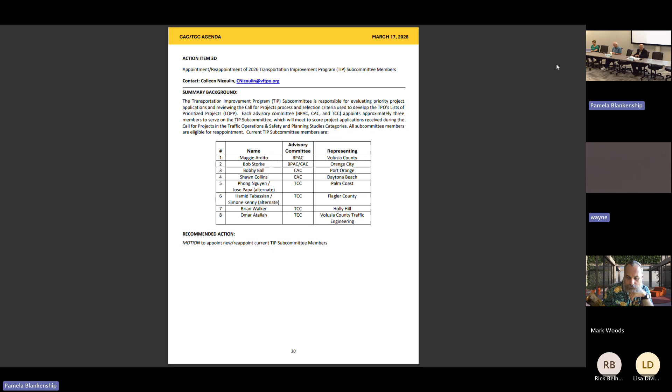Under presentations and discussion items, the first one is a presentation and discussion of the adopted Flagler County 2026 to 2035 Transit Development Plan.

Thank you, Mr. Chair, and thanks committee members for your time. I'm Jonathan Roberson with USF CUTR, and wanted to give you an update on the Flagler 2026 to 2035 TDP, which was adopted last night by the Board of County Commissioners.

I'll talk real quickly about the evaluation and alternatives development that happened since we last discussed this, an outline of the short and long-term needs identified, some recommendations for the next 10 years, and approval of the draft.

What is the 2026 to 2035 TDP? It's Flagler County's update to the previous TDP effort from 2022. By doing the TDP, it meets the requirements and allows Flagler County to qualify for annual public transit block grant funding for operating expenses. And the TDP identifies public transportation needs that are both considered cost feasible and unfunded, which we'll get to.

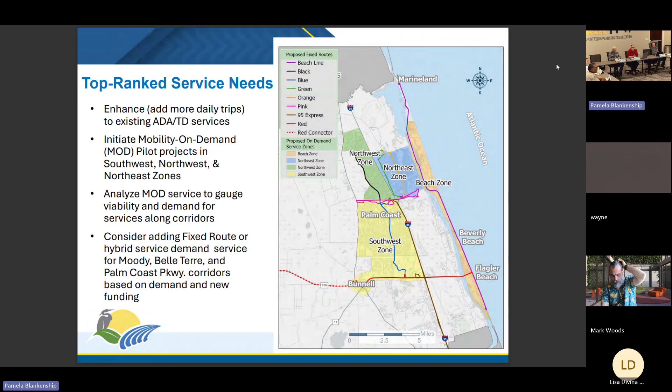Okay, we'll move on to C, which is presentation and discussion of the 2026 TPO annual call for projects.

So we just appointed and reappointed our TIP subcommittee members. Those are the members who will be reviewing the projects on this list in the traffic operations and planning studies category. But what we wanted to do is identify all the projects we received. We did receive 22 projects during this call, which is actually a heavy lift for us, so we were very excited. It's more than we've received the last few years, going back to pre-COVID times when we would receive those applications. But we do have it broken down into the different categories of the application.

So we have 2 different bike ped applications that we receive. We take in feasibility study applications, so those are local governments that wish the TPO to conduct a feasibility study, to look at potential projects, identify cost estimates, and see if the project is feasible, whether or not there are any obstacles to eventually constructing that project. A local government is not required to go through a feasibility study through the TPO. They can do that in-house. So some of our larger member governments do that in-house, such as Volusia County and Daytona Beach. Some of the medium-sized and smaller governments do come to us for feasibility studies.

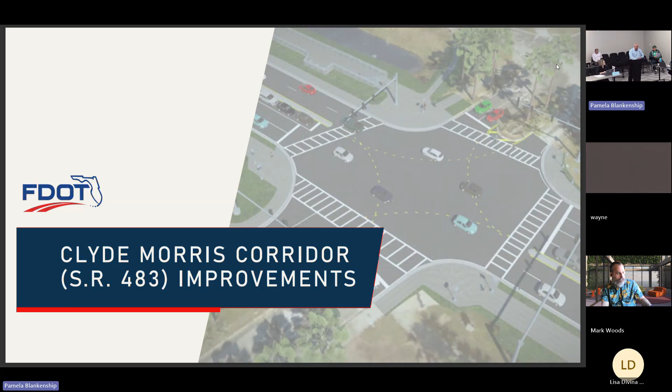Sorry for the little snap over here. What I'd like to do today is talk to you about some exciting improvements we've got on Clyde Morris Boulevard, from Beville Road, State Road 400, north up to Mason Avenue in Daytona Beach. Quick project overview: we're going to mill and resurface all the pavement within the entire project limits. We're going to construct the project into 3 segments, trying to take advantage of the available funding and take care of some of the higher priorities as we build them in segments. All sections will include, for most of the project, a 14-foot multi-use path on the west side of Clyde Morris, primarily between Beville Road and International Speedway. I'll get into that a little bit more.

We're going to introduce some raised medians instead of the 5 lanes you have out there, doing some access management with medians and better defined left turn lanes. The 4th bullet, I really want to emphasize it's not a typo: we are going to build a pedestrian underpass under Clyde Morris at Embry-Riddle's main entrance. I've got a little more on that coming up. We'll upgrade the drainage, part of which is closing the canal from International Speedway up to Richard Petty and piping that, putting a 14-foot trail on top of it. We'll improve the lighting through the whole corridor, upgrade all the traffic signals to mast arms, and upgrade the pedestrian buttons at all these signalized intersections. We are also working with Volusia County and the airport on possible realignment of the Bellevue Avenue extension.

They're looking into the feasibility of that. The county is. We're definitely working with them in whatever we can do to help that project along.

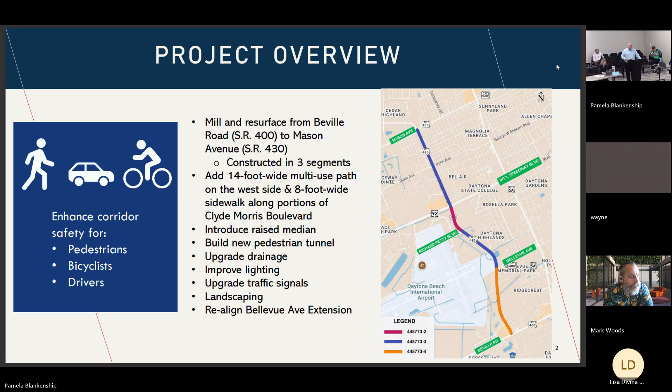The first segment I want to talk to you about is the segment you see in the box there. It's the red section, fairly small, but it gives us a good opportunity to get started. We're going to pipe the canal on the west side there between the Embry-Riddle parking lot, which used to be their soccer fields, and Clyde Morris itself. We're going to resurface.

We're going to put some raised medians in there. We're going to reconstruct the signal at Richard Petty. One thing not on this slide is we're going to add pedestrian features at Buccaneer Way, so they've got access to the 14-foot trail across there, and they won't have to cross International Speedway now. They could come down the west side and cross at Buccaneer Way.

We're going to work with the city of Daytona Beach and Florida Power and Light to accommodate their impacted utilities at the pedestrian tunnel. So Florida Power and Light will actually go underground. They're working with Embry-Riddle to underground all the facilities through the whole campus area. The current schedule is we're going to open the bids this fall and hopefully get started construction by the end of December if possible. The estimated cost right now is $9.9 million for that segment.

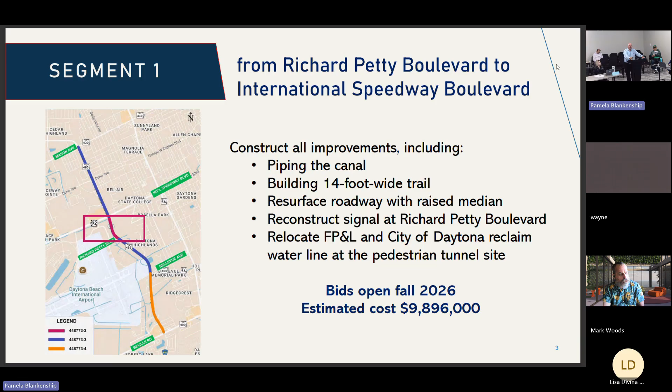Section 2, or segment 2, is broken up for the purposes of the presentation. It's 2 separate areas, but it'll be one construction project. The first one is from Aviation Parkway/Bellevue to Richard Petty. This is primarily in front of the campus itself and at the end of the runway. This is the section here. We're going to build a pedestrian tunnel at Embry-Riddle.

It's worth noting we did some pedestrian counts out there on 2 different days, a Tuesday and a Wednesday midweek, while class was in session. The Tuesday count was near 1,500 pedestrians between 8 a.m. and 4 p.m. The Wednesday count was almost 1,700. I'm not sure we have a busier crossing in the district that I'm aware of, so it is very, very busy out there. So the pedestrian tunnel is greatly needed. I'm not sure if everybody's aware, but there were 3 students hit last October out there, so this is good timing for this to come on board.

We're also doing some raised medians. The 14-foot trail will go on the west side, and we'll do an 8-foot sidewalk on the east side to tie in what's already out there. There's an 8-foot sidewalk there for a piece of the section, we're gonna match that. Again, we'll upgrade all the traffic signals with mast arms and pedestrian push buttons.

Segment 2B, if you will, is from International Speedway north to Mason Avenue. The primary work here is mill and resurface the roadway. We'll upgrade all the curb ramps to comply with ADA, upgrade the traffic signals primarily at Dunn Avenue to mast arms, and make some median improvements as we approach the hospital main entrance.

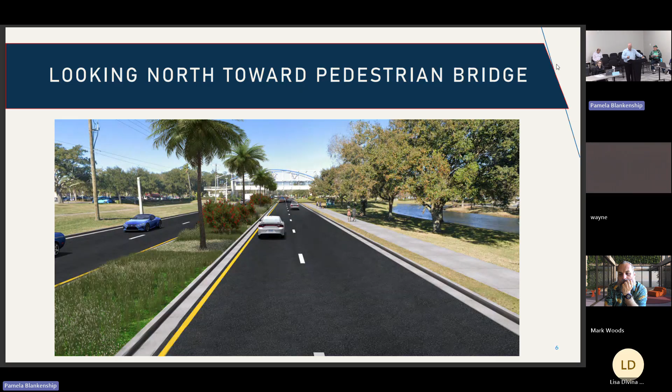A few features I do want to point out that the underpass will have: of course, very extensive waterproofing, so we won't have any leaking. It is a little wet there. We'll have some pumps on each end at the bottom of the stairwells for rainwater that comes down; those will automatically come on. We're going to do some CCTV infrastructure, and the campus will put in their cameras. We're going to do the blue light phone infrastructure, the student emergency call phones they have throughout the campus. We'll add the infrastructure within the tunnel for that and put in LED lighting.

So it'll stay very well lit all hours of the day and night. Because of the narrowness of the road, we can't put in a natural light in the middle, but we'll have a lot of LED lighting through there.

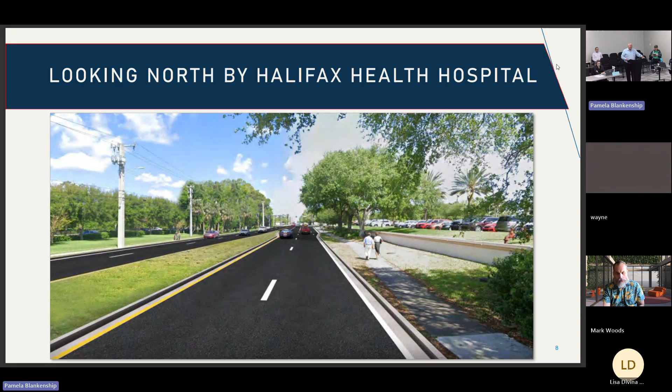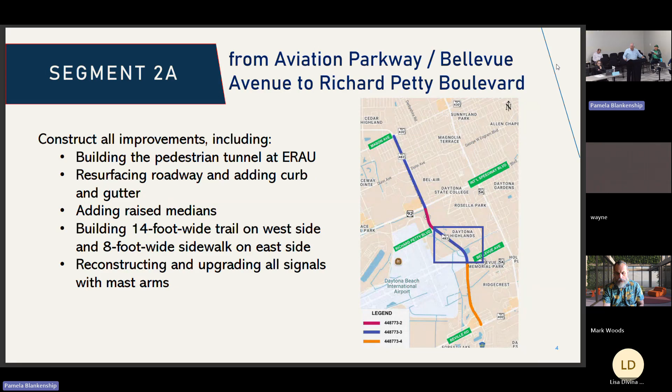Let me go back real quick. I skipped one thing I want to mention on section 2. The bids will open in the summer of 2027, sometime in the July timeframe. The construction estimate for all of those improvements is 12.8 million.

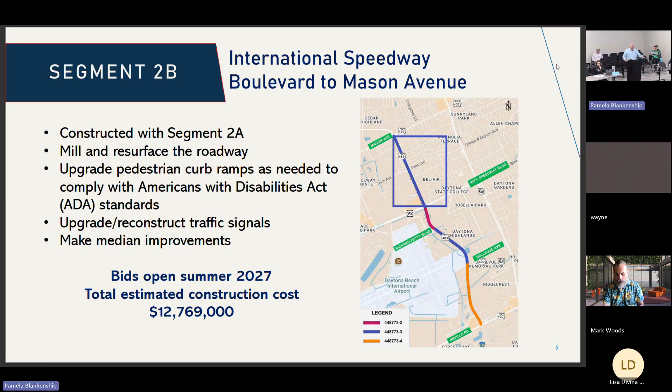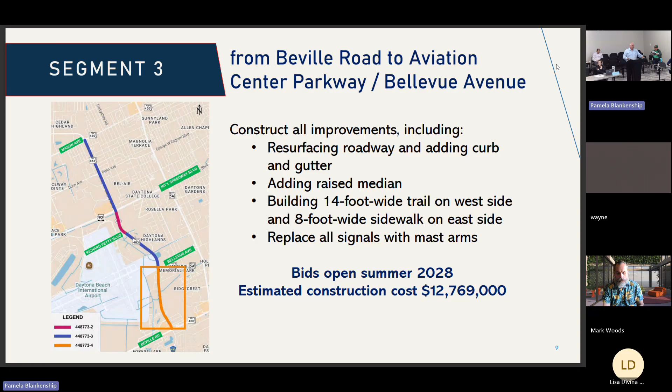Segment 3 will open those bids in the summer of 2028, hopefully around the July timeframe. Estimated construction for that piece is 12.8 million. There's a lot of drainage structures in there, so we'll have to pipe everything and get the water to the current drainage systems that are along the corridor.

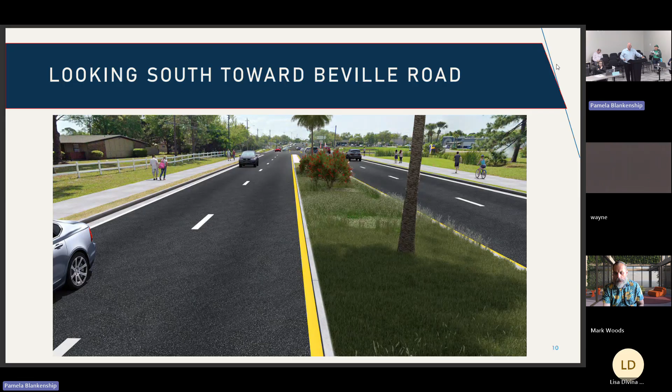This is just a quick look down near Corona, looking south. On the right-hand side is the Publix Plaza, and Beville Road is at the top of the picture.

Real quick, estimated schedule. Since we are breaking it up, we're trying to overlap the projects as much as possible, so it does appear as one project even though it's three separate ones. The first one, we'll open the bids in the fall of this year, hoping to start construction in December of this year. Estimating about a 9-month construction time on that.

By the time that one's wrapping up, we'll start segment 2, which is 2A and 2B, and that should run almost a year. Then we'll open up the bids for segment 3, taking us out to 2029 or almost 2030 before total construction is complete.

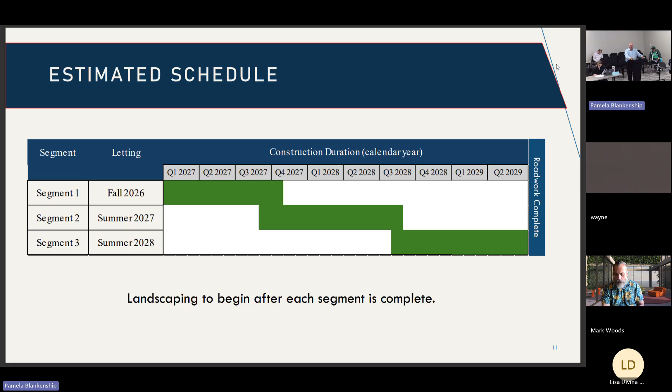One thing I want to point out: after each segment is done, we'll do a landscaping project. I don't have this design done yet, we're working on that, but we're going to try to schedule the opening of the bids for the landscaping projects before each segment is done. That way they can just go right in there and complete it, and we'll have a finished product as they march down the road.

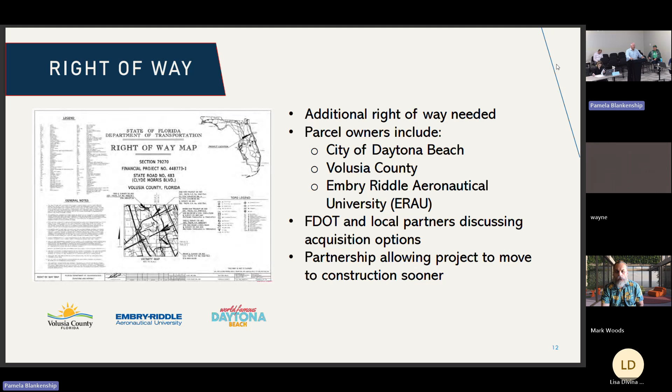This is important: if the DOT had followed our normal process on this, we do have some right-of-way needs, and our right-of-way process, whether it's 1 parcel or 100 parcels, is about a 2-year process. If it weren't for working with our great partners in the city of Daytona Beach, Volusia County, and Embry-Riddle, we would need another 2 years before we started construction. But they've come to the table, they've partnered with us, and they're donating the right-of-way that we need to complete the whole project. We could not do this without their help, and it's very important that we point that out.

I think I went through this a little quick, but do y'all have any questions?

Yes, sir, if you could go back to the slide with the pedestrian tunnel. Yes, sir. There we go. I'm just wondering, is there a reason why, or has it been considered, that right where it curves off of the main walkway there—yes—

on both sides, a cover over the walkway, not a full cover, but something that would channel the water off to the sides. The reason I ask is my concern—just throwing it out there—is when you get to that point and then to the other side, the same thing: I'm afraid people in the rain, instead of walking all the way down and back, will run across the street and get hurt. But if it's covered and the water channels to the sides, it doesn't run down the ramp as much, and it encourages people to get in there under cover versus walk across the street in the rain with low visibility, et cetera.

That's something we had not looked into, but I've got a note here to see if it's something we can do. Keep in mind, the wall is only about 3 feet high along both sides. It starts around 2.5 feet and gets higher as the ramps go down. So covering would be, I don't know, we'd have to look into it. Thank you, I appreciate that.

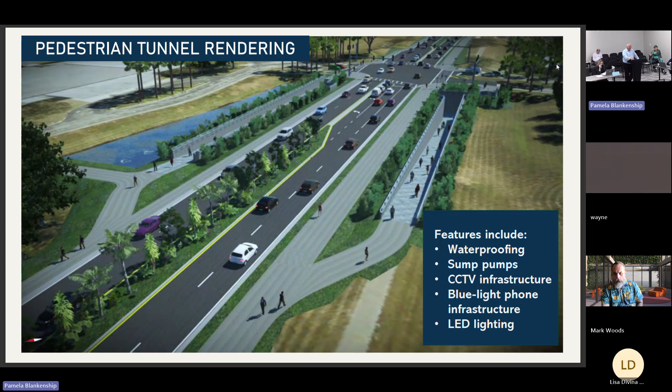Good afternoon, happy St. Patty's Day.

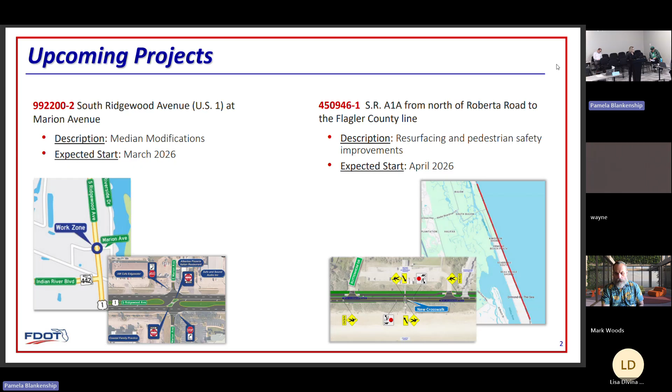Just a couple of things, real quick. I want to start off with a couple of projects that we have starting. We have some median modification starting this month for South Ridgewood Avenue at Marion Avenue, and then the State Road A1A from north of Roberta Road to Flagler County line. We're starting our resurfacing and pedestrian safety improvements, and that starts in April.

The next one - I just want to do a quick project highlight with a short video. Recently we completed the roadway improvements along US 17 in De Leon Springs, from south of Spring Street to Lake Winona Road. So I'll show you a short video here.

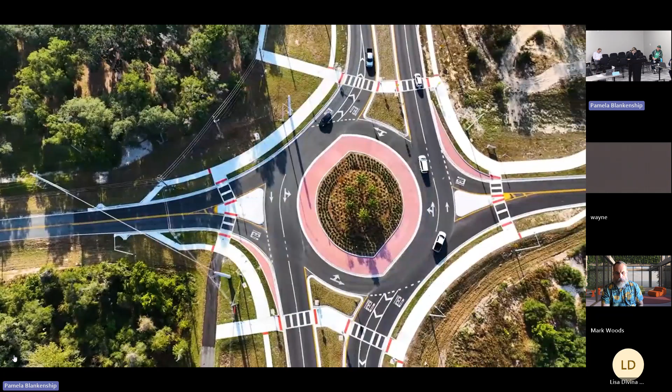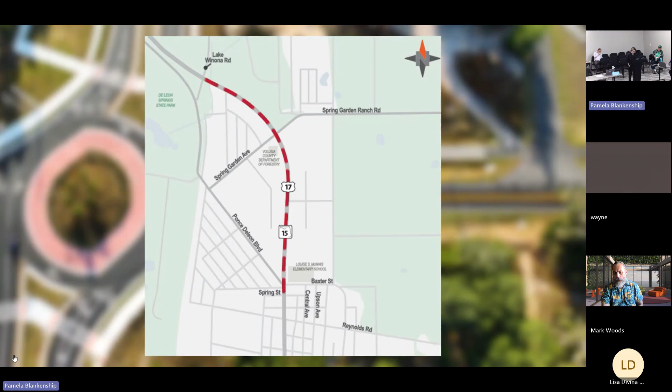De Leon Springs, a peaceful historic community, has experienced steady growth. US 17, also known as State Road 15, serves as a vital transportation route. As traffic volumes have increased, so has the need to improve safety and capacity along the road. To address these needs, the Florida Department of Transportation began a roadway improvement project in September 2023 to widen US 17.

The project widens the roadway from 2 to 4 lanes, improving traffic flow and reducing congestion. At the heart of the project is a new roundabout designed to promote continuous movement and slower speeds. Roundabouts like this one can reduce fatal and serious injury crashes by 82%. Additionally, a concrete truck apron allows large vehicles to navigate the intersection safely and efficiently.

Pedestrian safety is also a key focus. The roundabout crossings are equipped with rectangular rapid flashing beacons, which flash bright yellow when active, alerting drivers to pedestrians waiting to cross. Additional improvements include the installation of De Leon Springs' first and only traffic signal, to help students safely cross to and from school.

Across the highway, the crossing guards were all we had, and we saw crossing guards really in danger a lot of times because drivers just weren't paying attention. So the signals have made such an improvement in the safety of crossing guards, the safety of the families in the morning walking their kids back and forth, and the children going back and forth to school too.

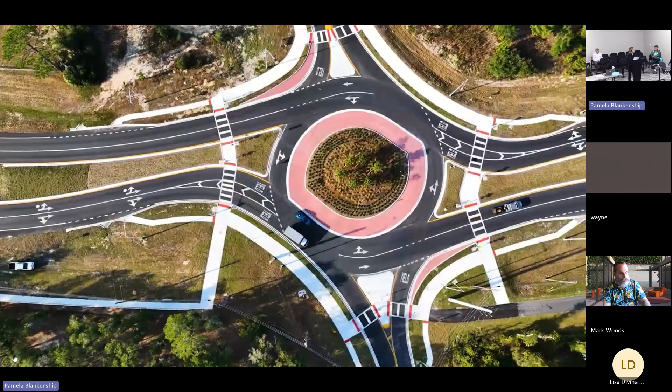The new multi-use trail also expanded connectivity for pedestrians and bicyclists. Throughout construction, FDOT collaborated closely with local partners to manage detours and minimize disruptions. Together, these improvements create safer, more efficient movement for drivers and pedestrians in the surrounding community.